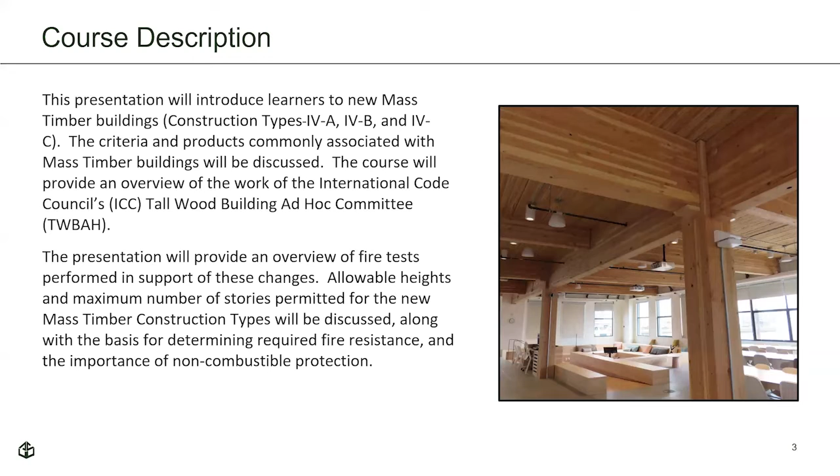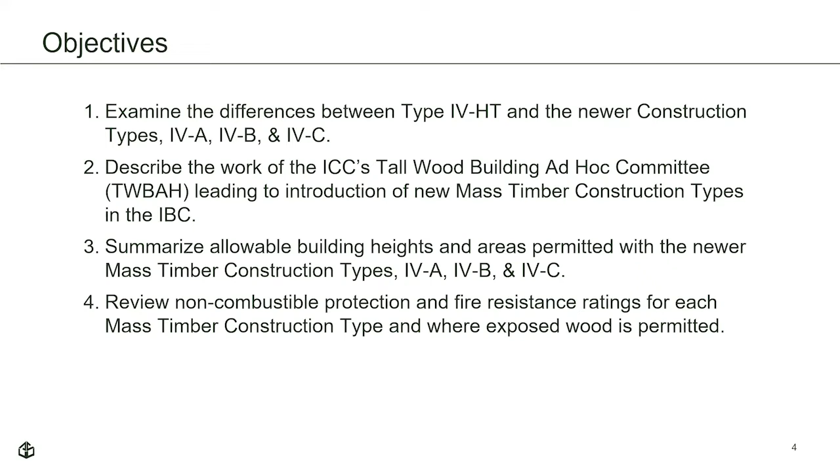We will introduce mass timber buildings that fall under the Type 4A, 4B, and 4C construction types. Next, we'll provide some background and history on how the tall mass timber provisions were reviewed and promulgated into code changes prepared by the ICC's Tall Wood Building Ad Hoc Committee. Then we'll discuss some of the heights, number of stories, and areas associated with mass timber structures. And finally, we will review the importance of non-combustible protection and its contribution to the overall fire resistance ratings required with the 3 mass timber construction types, and review when exposed wood areas are permitted specifically under the criteria in Type 4B construction.

Let's begin by giving an overview of the various forms of mass timber and a brief history of some of the more recently developed ones.

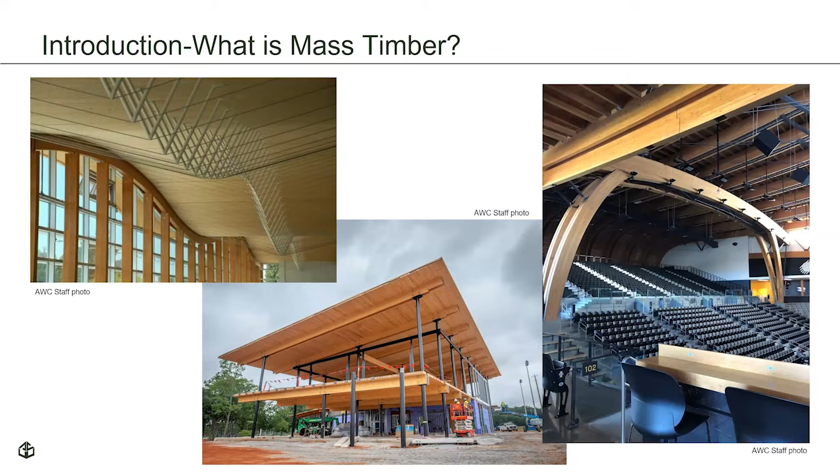So when we talk about mass timber, what does that actually mean? What do these buildings look like? How is it different from a post and beam or traditional heavy timber building? This slide is depicting the newer mass timber style of construction. In the center, we have a hybrid steel, glulam beam, and cross-laminated timber building on the campus of Penn State University. The photo on the left is the Samuel Brighouse Elementary School in British Columbia, Canada. Notice the undulating form of the glulam beam above the curtain wall assembly. And on the far right is the University of Idaho's Idaho Central Credit Union Arena for both men and women's Vandals basketball, located in Moscow, Idaho.

Before we move on to the next portion of this presentation, I wanted to briefly note one very important point. As I hope you've gathered from the pictures we've seen so far, mass timber construction is very different from conventional, repetitive light frame construction. In mass timber construction, the members have significantly larger cross-sectional dimensions and are much further apart. Also, there tends to be fewer concealed spaces, and these spaces are required to be protected if they are combustible. Consequently, the structural design and response to fire of a mass timber building are significantly different from how a repetitive light frame structure would be affected. These inherent differences provide the basis of historical prescriptive provisions for Type 4 HT construction, as well as for the new mass timber construction types 4A, 4B, and 4C.

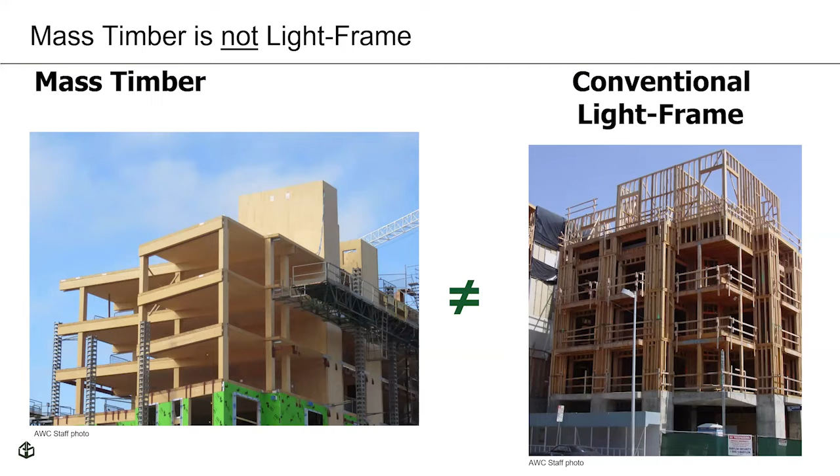The concept of mass timber, or tall wood buildings, is not a new one. Many of these older buildings, including the examples shown here, have still not reached the end of their service life. These historical timber buildings were constructed using solid sawn heavy timber beams and columns. Exterior walls of these buildings are non-combustible and typically associated with masonry construction, and with a few exceptions, they were built in a manner that did not result in concealed spaces within floors and walls. This type of construction is now prescriptively addressed in the IBC as Type 4-HT.

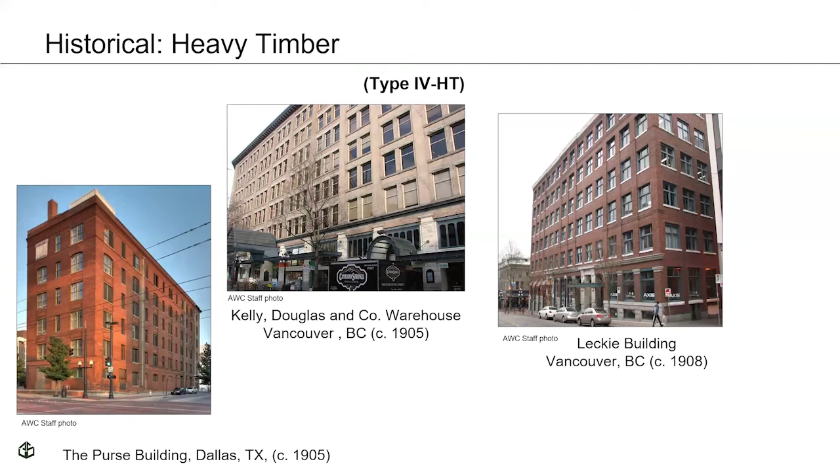The photo on the left is the historic Butler Building in Minneapolis, St. Paul, a 9-story post and beam heavy timber building. On the right is an in-progress photo of the iconic Brock Commons building, which at the time was the tallest mass timber building in North America, now in use as student housing on the campus of the University of British Columbia in Canada. It has a concrete podium with reinforced concrete stairway and elevator hoistway shafts and 17 stories of glulam and CLT floor ceiling panels. We'll take a look at the video that documents its construction on the next slide.

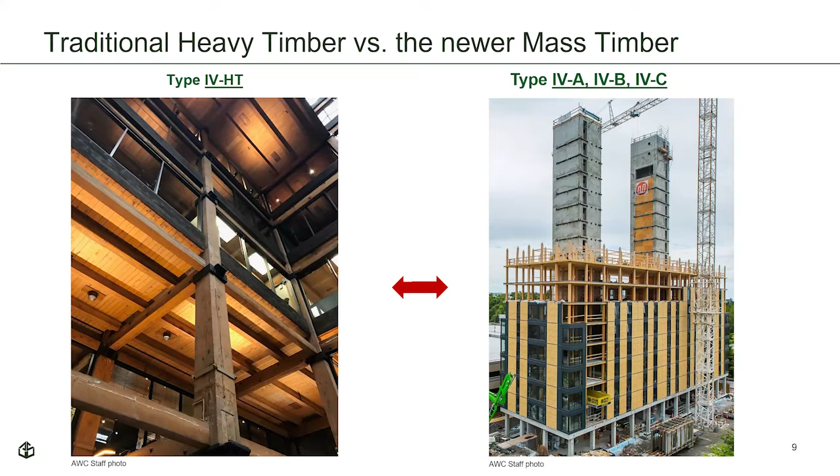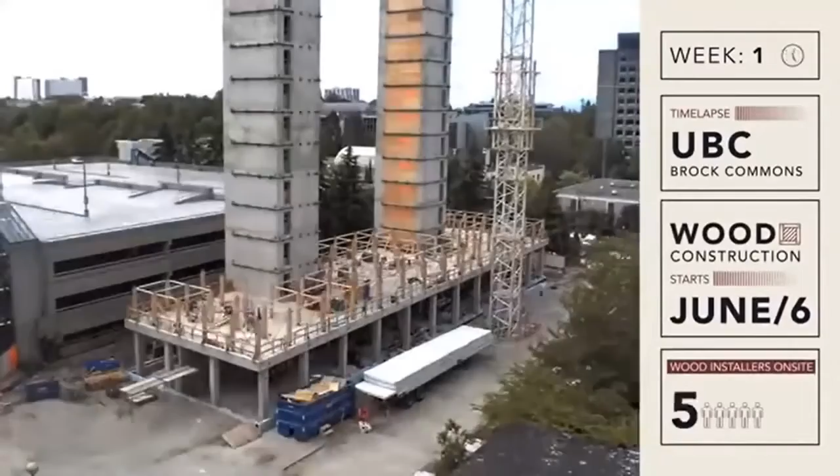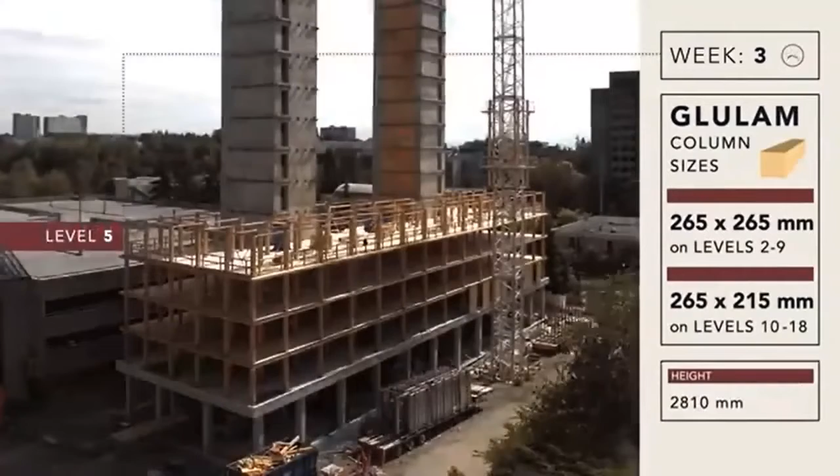So this is the 18-story Brock Commons building in British Columbia. As we mentioned previously, it's student housing, so it has a reinforced concrete podium on the base floor. You can see the two structures there that are reinforced concrete, the stairway shafts and elevator hoistway shafts. They use these to provide seismic performance and lateral resistance for this particular project.

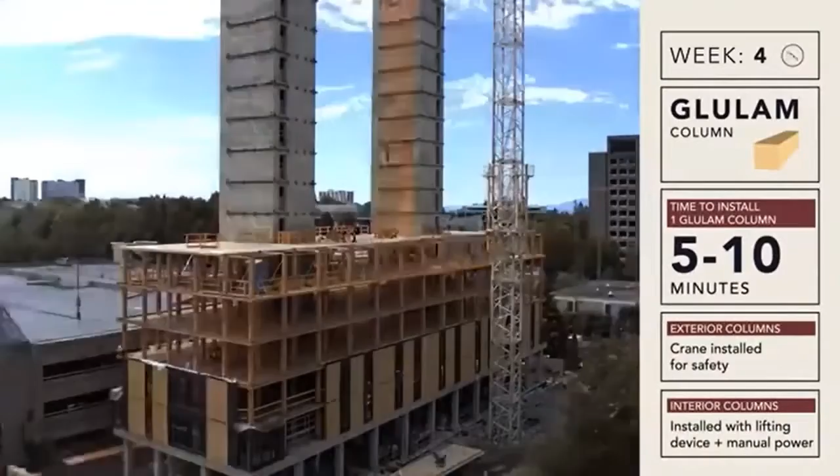You can see the description and the sizes of the glulam columns that support the cross-laminated timber floor and ceiling assembly, and some data as the slideshow progresses about how much time it takes to install each individual column, and the crews installing the panels on top of the columns.

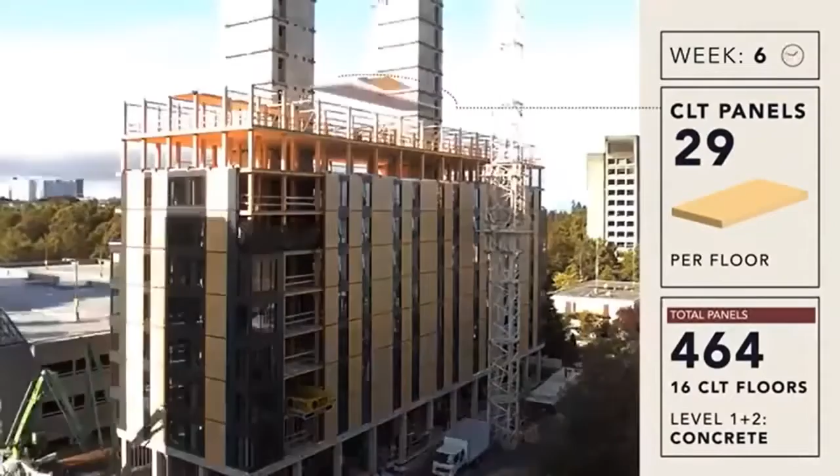The construction speed here is annotated on the slide, about 2 floors per week. There's no waiting for concrete to cure or reach structural strength, time periods of 7, 14, 28 days, et cetera, for concrete. It goes together pretty quickly.

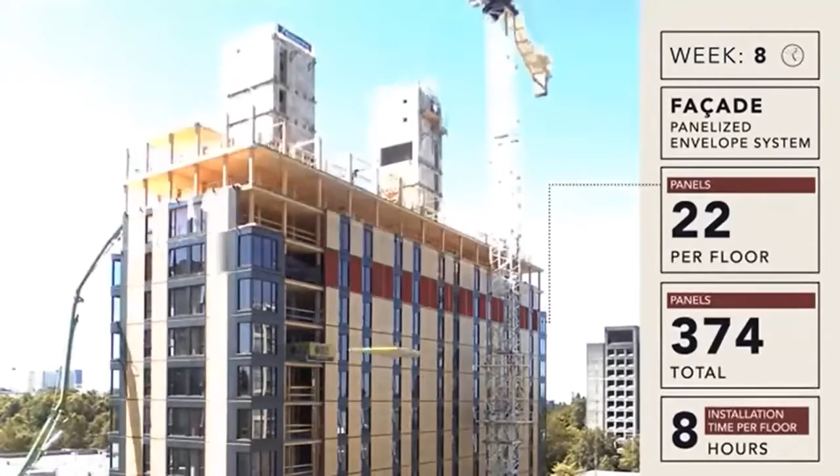A very, very small crew is typically required for these projects. You see the crane operator picking them right off of the trucks. It's typically quiet associated with these jobs, not as much noise as conventional construction. All the panels are CNC machined from the assembly plant, from the manufacturing plant, so there's very, very little waste. You can see the speed of construction there.

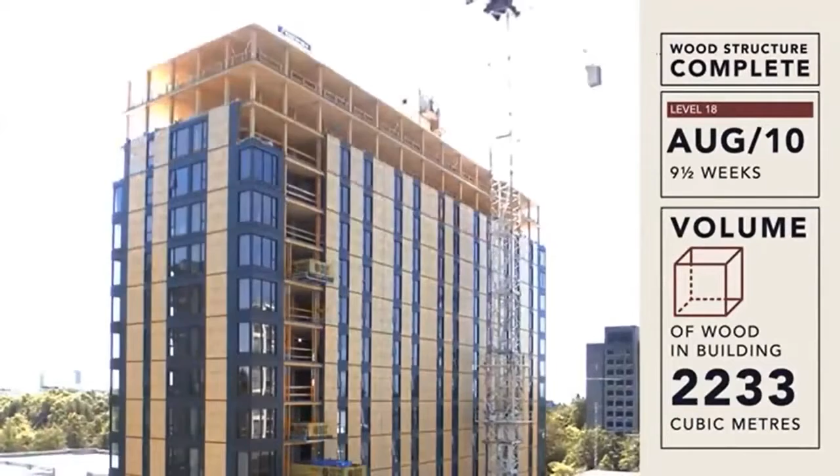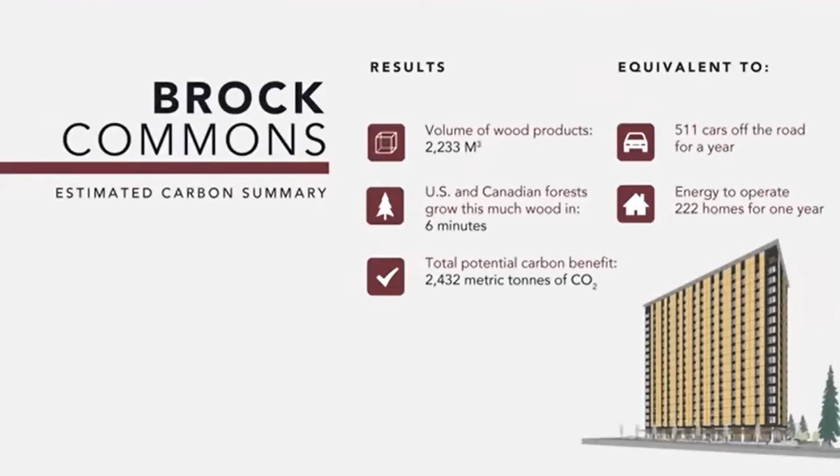Approximately 2,233 cubic meters of wood were used, and these have significant positive impacts about sequestering carbon and carbon dioxide benefits. So just a really, really innovative and interesting project. This is no longer the tallest structure in North America; there are some other projects we'll take a look at during the presentation.

Mass timber is a term used to describe wood products and built-up assemblies having large dimensions and substantial mass. This is a list of those elements often associated with mass timber, if they are large enough to be in compliance with the minimum size requirements for heavy timber as specified in Table 2304.11 of the 2021 and 2024 editions of the IBC.

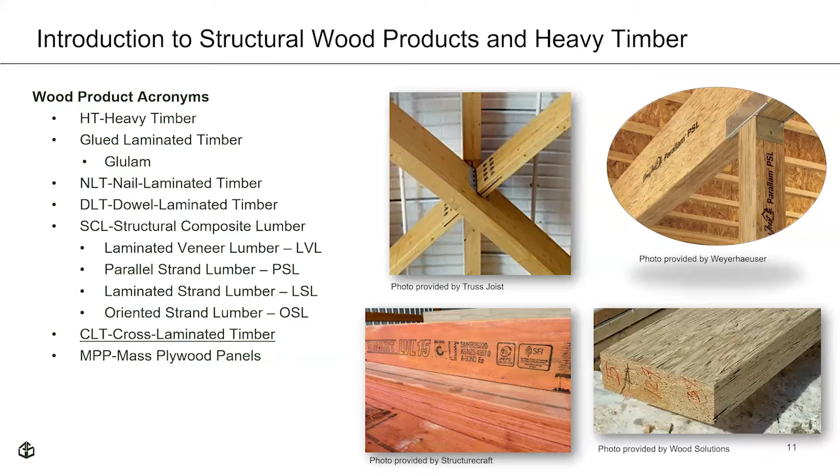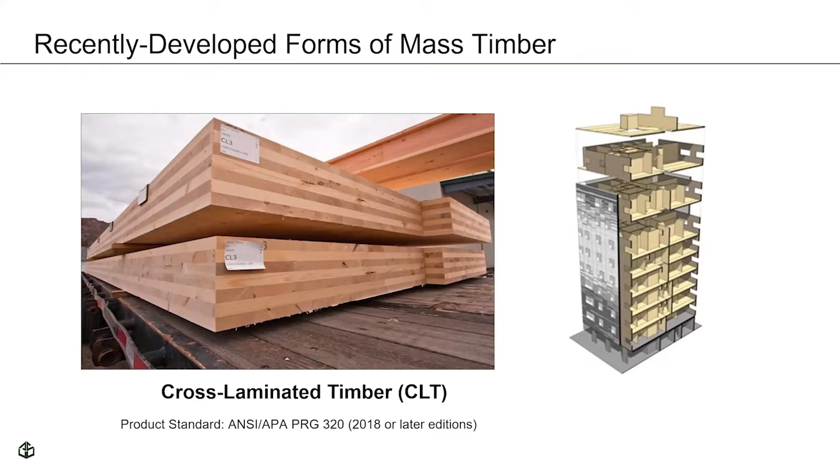Mass timber is a separate building system, really born because of one new product, cross-laminated timber, or CLT. CLT represents a paradigm shift in wood construction because of the new structural and fire resistance characteristics it represents. Never before have we contemplated solid wood floor and wall sections used in a similar manner as concrete walls and floors. CLT is typically dimension lumber, 2x lumber, laminated in a crosswise fashion, layer upon layer, to make solid wood floor, wall, and roof panels up to 20 inches thick and 60 feet long. What has been used so far is typically more like panels between 6 and 9 inches thick. CLT panels are typically fabricated in odd numbers of laminations, 3, 5, 7, 9 plies, etc.

For example, due to regulatory programs promoting green and sustainable construction, England has seen a tremendous increase in the use of mass timber construction, with over 500 buildings built to date. The U.S. Building Code, known as the International Building Code, or IBC, adopted provisions and definitions recognizing CLT as a heavy timber product starting in 2015.

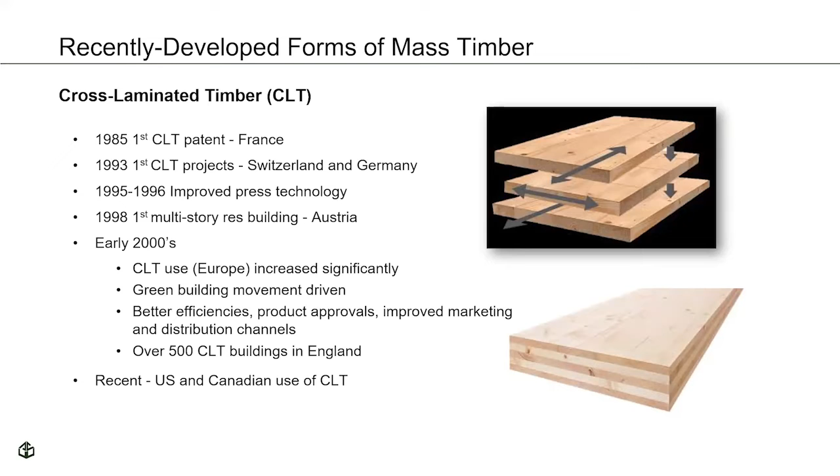Another type of mass timber which has been in use for several decades is glue laminated timber, also known as GLT or glue-lam. Glue laminated timber beams meeting the minimum dimensions can be used in heavy timber or type 4 HT construction and the mass timber construction types as well.

Standard widths of glue-lam members can exceed 12 inches and standard depths can be up to 60 inches, or 5 feet. Glue-lam members are constructed with smaller dimensional lumber, typically nominal 2x lumber, which are adhered to each other using heat-resistant exterior grade structural adhesives.

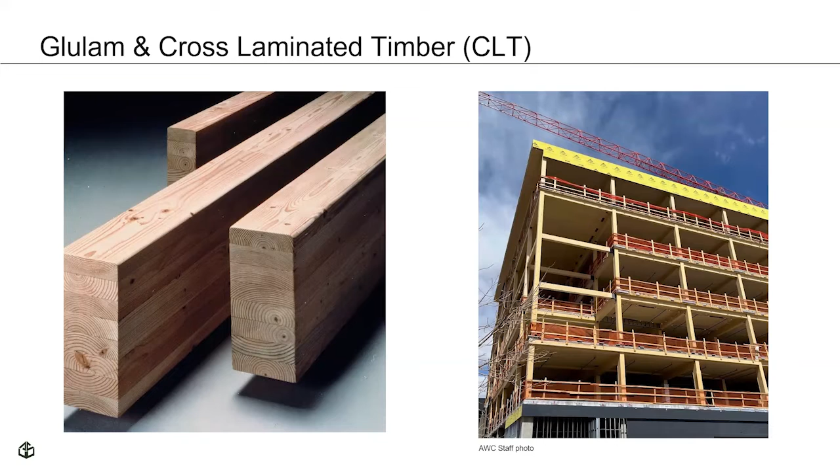In glue-lam, all the laminations are oriented such that they are parallel to one another. Glue-laminated members are typically used for flexural applications, for example beams and girders, or compression applications such as posts and columns. However, they may be used in tension applications too.

You can see some structural similarities with the student housing building project at Brock Commons. The Ascent project exceeded the prescriptive limits for tall mass timber in the 2021 IBC. The Ascent project has a 6-story concrete podium or pedestal, and then 19 stories of glue-lam columns with CLT floors and ceilings. Currently, the Ascent building is the tallest mass timber structure in the world.

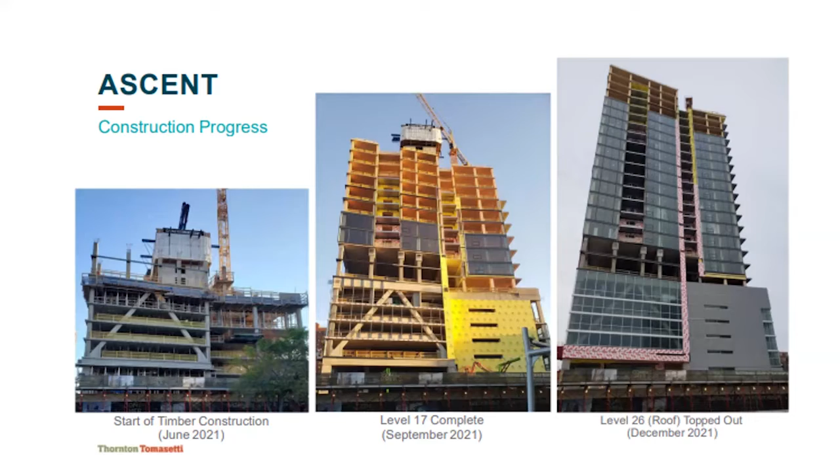Now let's discuss the critical role the ICC's Tall Wood Building Ad Hoc, or TWBAH for short, had in reviewing the mountains of data required for the code change proposals associated with mass timber buildings.

The TWBAH was a balanced committee that was intended to develop consensus by input from experts throughout the country, starting with experienced building and fire officials, leading structural and fire protection engineers, fire protection experts, and representatives from all building material and construction-related industries. The meetings were open and participated in by any interested parties, including participation in work groups.

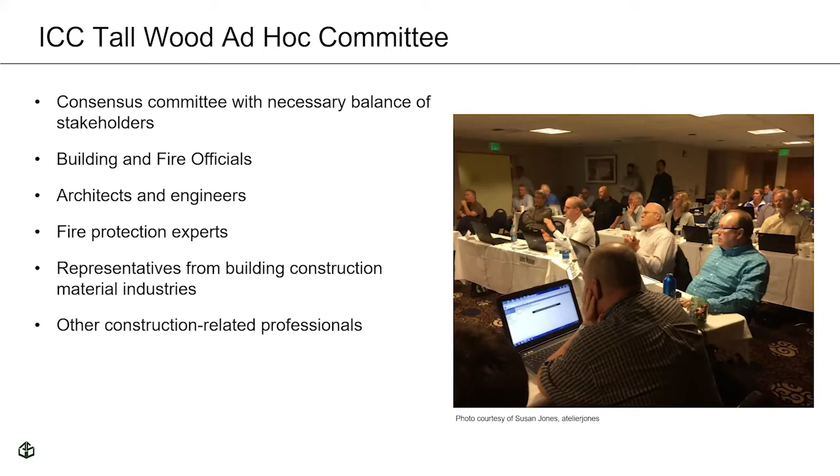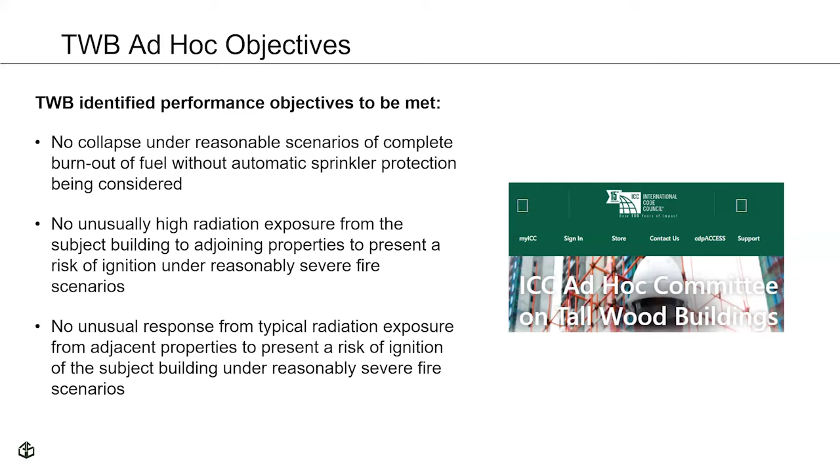Some of the key tenets from the TWBAH utilized when considering the tall mass timber code change provisions were: no collapse under reasonable scenarios of complete burnout in the absence of application of automatic sprinkler systems, no unusual levels of radiant energy exposure from the tall wood building to adjacent buildings, and no unusual response to typical radiant energy from a fire next door to the mass timber or other exposure.

No unusual fire department accessibility issues. There are often fire department accessibility issues on construction sites, so the committee felt it was important to introduce explicit provisions to ensure firefighter access.

Egress systems must protect occupants during escape time, plus an additional factor of safety. And lastly, suppression systems must be highly reliable. In fact, there are redundant suppression systems required for any mass timber building over 120 feet in height. After evaluating these performance objectives, the TWBAH was satisfied that all performance objectives were successfully met.

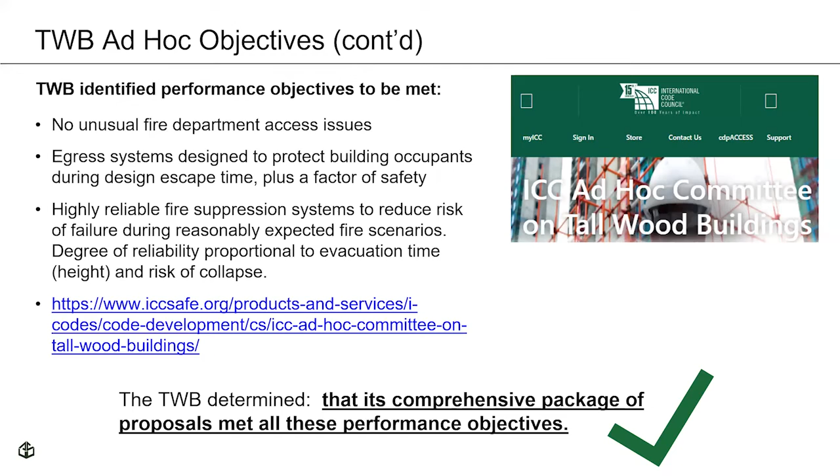One of the various work groups established to review potential code changes was the fire work group. They were tasked with determining realistic fire tests to evaluate the fire resistance and performance of a building constructed with mass timber elements. The express purpose of the test series was to evaluate occupant egress tenability and firefighter attack tenability.

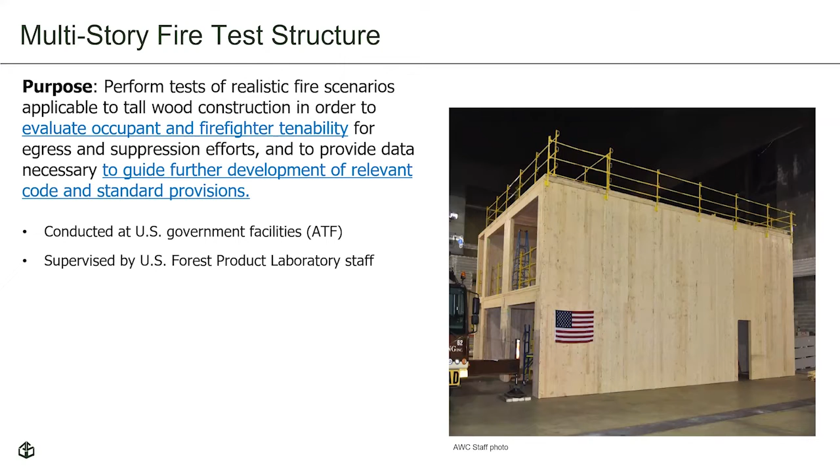Each new construction type in the 2021 IBC was based on at least one of these test scenarios. The fire test plan was drafted with the input of career fire service members who had real-world experience with fires in multi-story buildings and dictated the configuration of the buildings tested at the ATF lab.

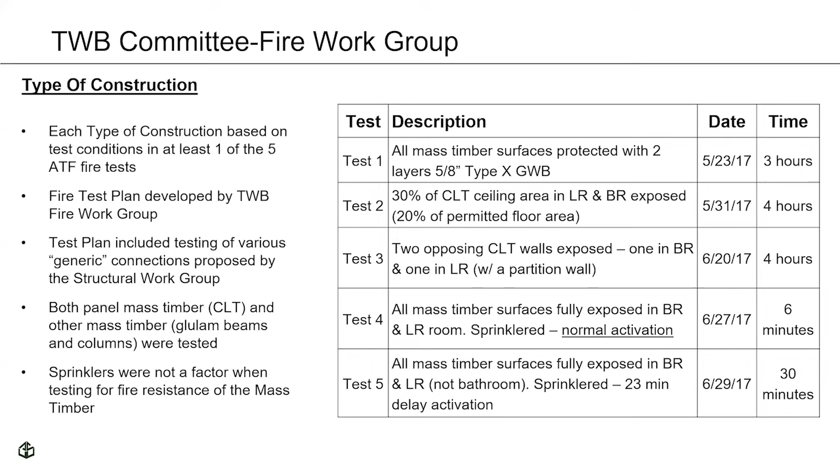Through penetration protection and connection protection were also included within the test structure. It should be noted that the ATF test structure included not only CLT members, but also glue laminated columns and beams.

You can see the attached corridor and two-story configuration of the test assembly. The fuel load was based on a North American study of fuel loading for residential use groups.

In fact, to ensure rigorous test conditions, furnishings and additional fuel load were added to achieve a fuel load equivalent to the mean plus one standard deviation. The actual fuel load used within the test structure corresponded to approximately the 85th percentile of residential fuel loads based on the survey.

Regarding the fuel loading, megajoules and megawatts might not resonate with some of our attendees in the audience today. For better comprehension or comparison, the energy release equivalent for test 2 and 3 would be like igniting 360 gallons of gasoline within the test compartment.

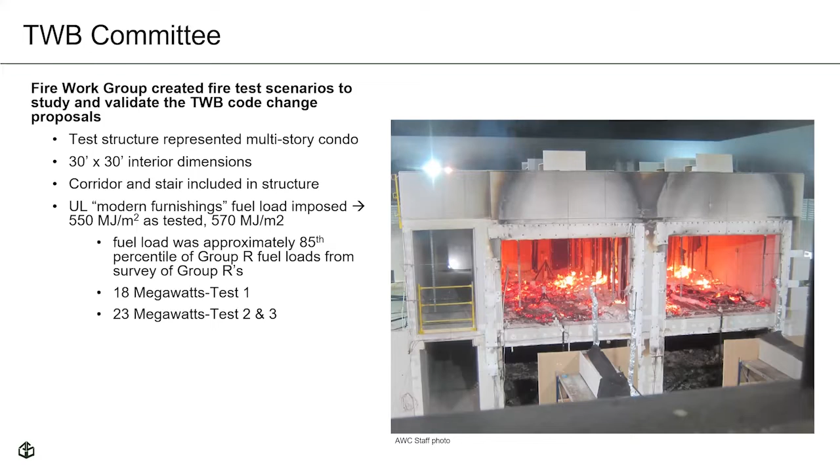No combustible material is permitted in concealed spaces of the soffits, which had gypsum protection on the mass timber, light gauge, cold form steel stud framing.

Each unit had plumbing, mechanical, and electrical penetrations, but no utilities were connected. The penetrations were protected pursuant to current code provisions to determine their performance in mass timber structures.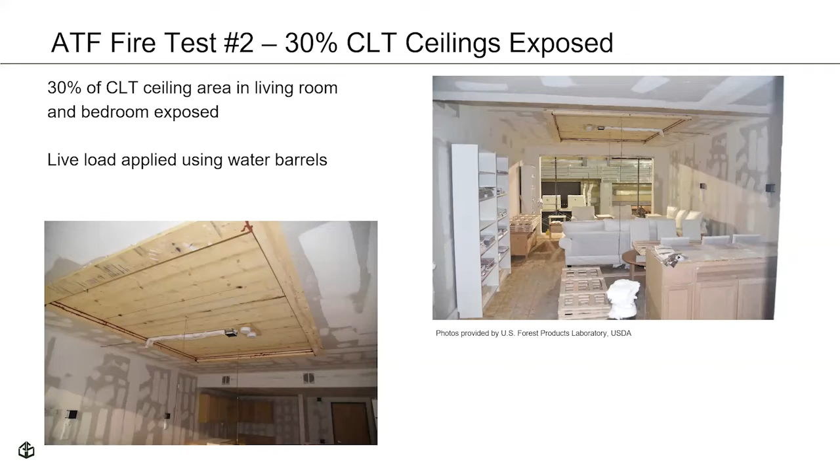So we're going to watch a highly compressed video of test 2. Remember that test 2 was the one with the exposed portion of mass timber on the ceiling. The test lasted for 4 hours, but this is a time-lapse video which compresses that down into about 3 minutes. It was produced by the folks at ATF, and I think they did a great job with it because it includes simultaneous views from multiple cameras placed throughout the structure.

I'll start the video here. Here you can see the multiple camera angles. You can see the fire service in fully protected gear entering the compartment. They're going to be igniting a gasoline-soaked rag in the same location for all the tests, which would be in the lower base cabinet area in the kitchen.

So the kitchen and the living room are combined, and the bathroom and the bedroom are combined as well. And there's a demising wall between those two spaces with gypsum wallboard and light gauge steel studs. So you can see our fire service are about to ignite the gasoline soaked rag. And I'll speed things up here in the interest of time.

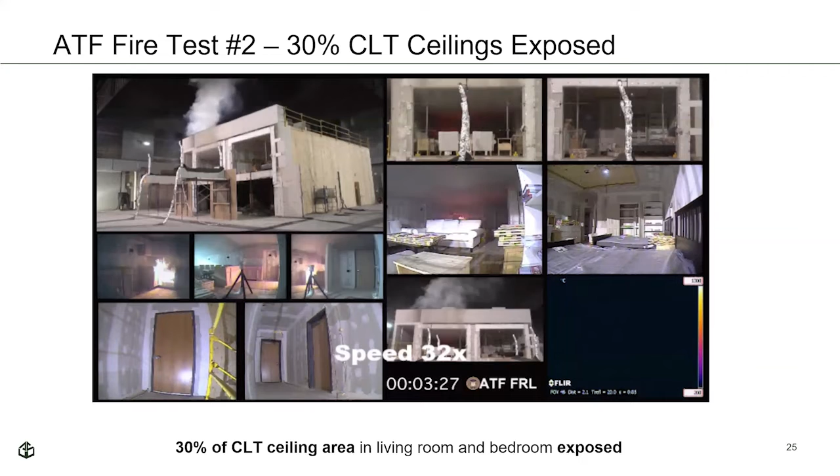It should be noted that just the contribution of the fuel from the base cabinets was enough to ignite the upper cabinets, and the combination heat release from the lower and upper cabinets is enough to cause flashover conditions in the great room compartment. So we're approaching flashover in the living room at approximately 12 to 13 minutes.

You can see the flames rolling on the ceiling there. And this will ensure the temperatures in the compartment reach flashover, which is measured 1 foot from the ceiling and 600 degrees C. Let's speed this up a little bit.

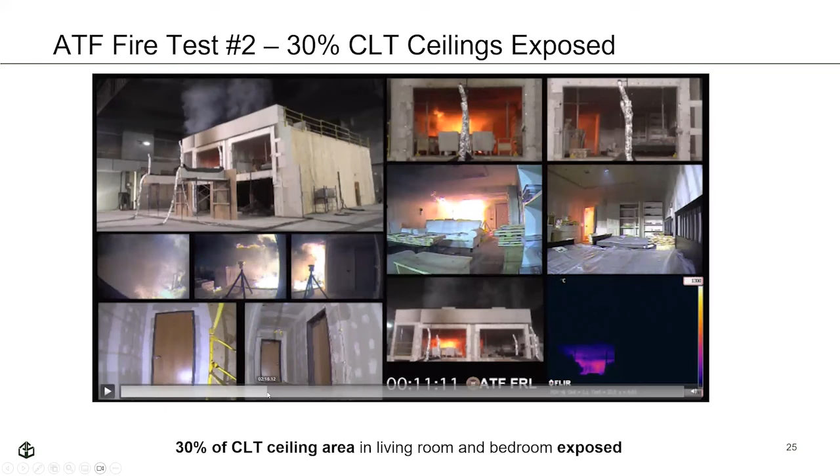So now we have flames rolling out of the opening. The cell in the bottom right is an infrared camera showing the heat release from the compartments. Notice that not all the furnishings have spontaneously ignited. The 2 chairs there are just about to spontaneously ignite now, but everything is in flashover conditions and fire growth in the first compartment.

You can see in the cell on the middle right of the video here that we have the mattresses wrapped up in plastic. They're foam mattresses. You can see all the combustible cribbing throughout the room, stacked in the room, and the heavy black smoke rolling through the open door. This door opening is going to allow enough heat and smoke into the joint bedroom and bathroom compartment to cause flashover conditions

in the bedroom. You can see the mattresses, the coverings are starting to pyrolyze there, and off gas, and they're going to spontaneously ignite with flashover.

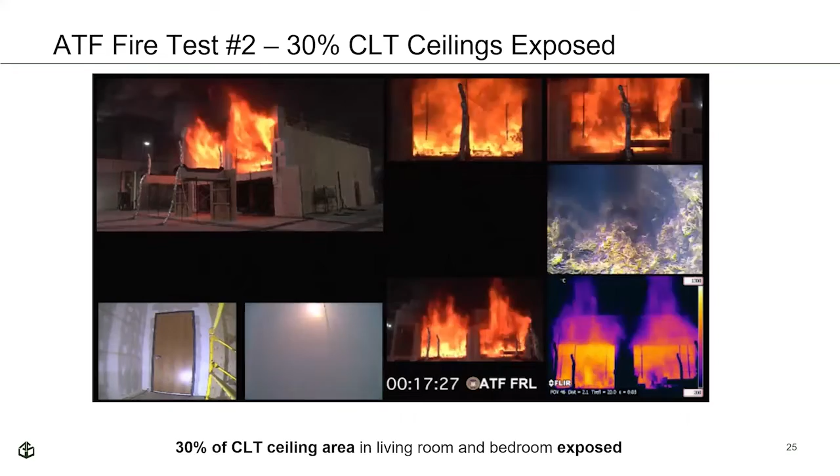The image on the bottom left of the video is the actual fire-rated door at the end of the corridor. And the image next to that, you see a little flame front penetration through the compartment door, through the dwelling door into the hallway.

So I'm going to speed this up. You can see the performance of the 20-minute rated door. Here, it'll fall into the opening, but you can clearly see that we're in the decay phase. The infrared imagery has drastically dropped in temperature, and they will continue to monitor this test to ensure that there's no fire regrowth conditions. And I'll speed it up to the end.

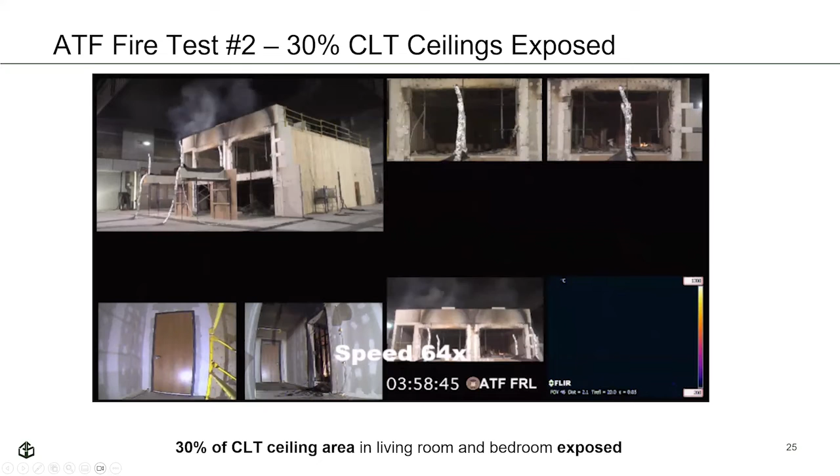Here are the still shots from test 2. Ignition to flashover in the living room is about 12.5 to 13 minutes. Flashover in the bedroom is approximately around 17 minutes. And then the fire proceeds to burn out and the mass timber elements self-extinguish. Notice the char formed on the exposed mass timber ceiling areas just as predicted.

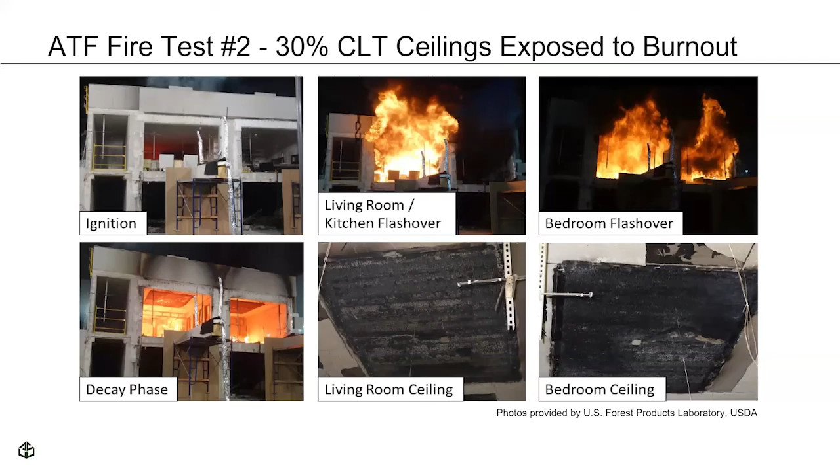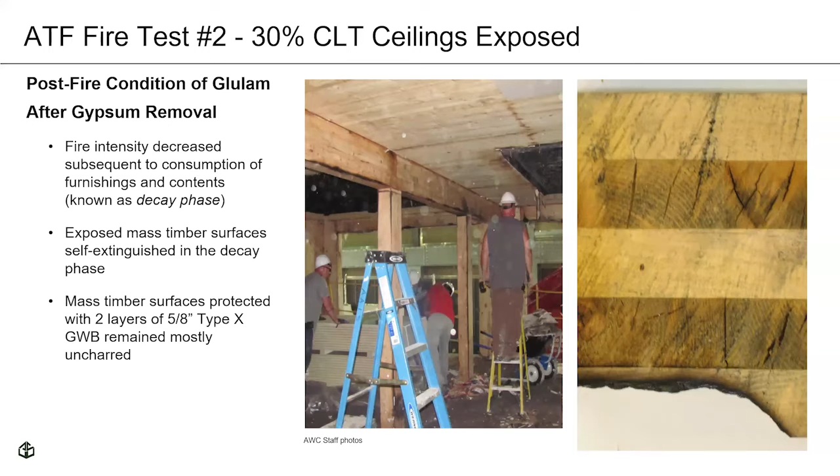Just like for test 4, in test 5, all mass timber surfaces were fully exposed in both the bedroom and living room. The sprinklers were purposely prevented from activating normally, then were manually charged 20 minutes after the time at which the automatic sprinklers activated in test 4. This simulated a scenario in which the sprinklers failed to activate automatically, but are then manually charged at the fire department connection by the fire service upon their arrival at the scene.

Flashover conditions were reached in the kitchen, and the bedroom was very near reaching flashover. Within 7 minutes of manually charging the sprinklers, the fire went from a fully developed stage to being effectively suppressed, as can be seen in the lower right photo.

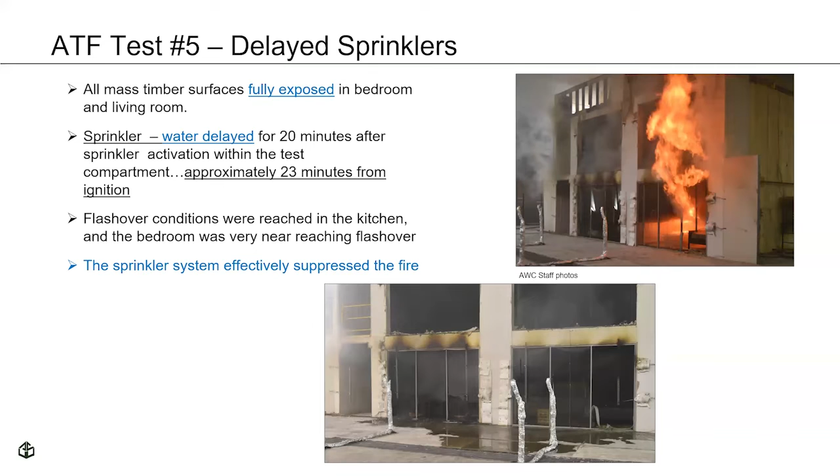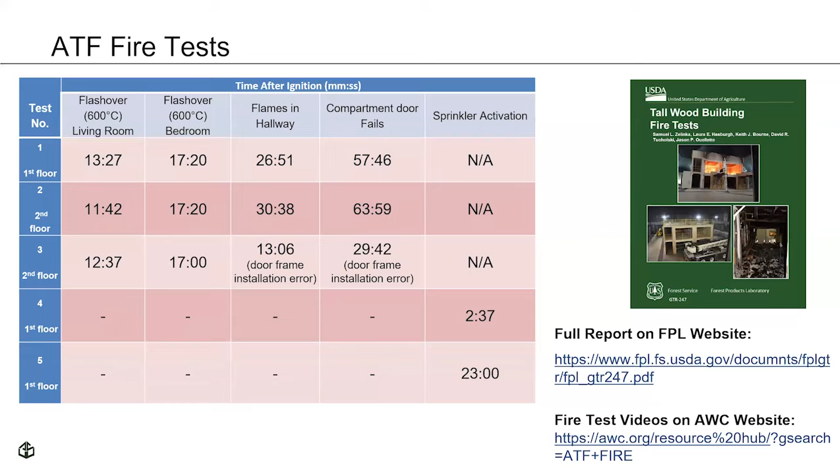Some data on flashover time, performance of the compartment door, and sprinkler activation times are listed in this table. The full report was published by the U.S. Forest Products Lab in 2018 and is available on their website at the URL address shown here. All the fire tests were recorded on video, and these videos are available for free public viewing.

Now let's review these new construction types, specifically types 4A, 4B, and 4C. I'll explain what each of these are and the prescriptive provisions associated with each.

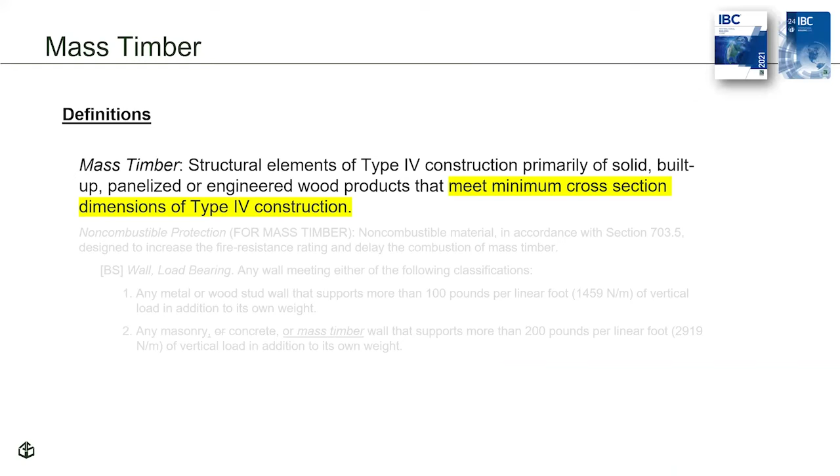A new definition was created to define mass timber. It is based on the same minimum cross-sectional dimensions as traditional heavy timber. The minimum dimensions for heavy timber are located in table 2304.11. This slide is providing information on the minimum sizes necessary to be considered mass timber. Details are found in IBC sections 2304.11 and 602.

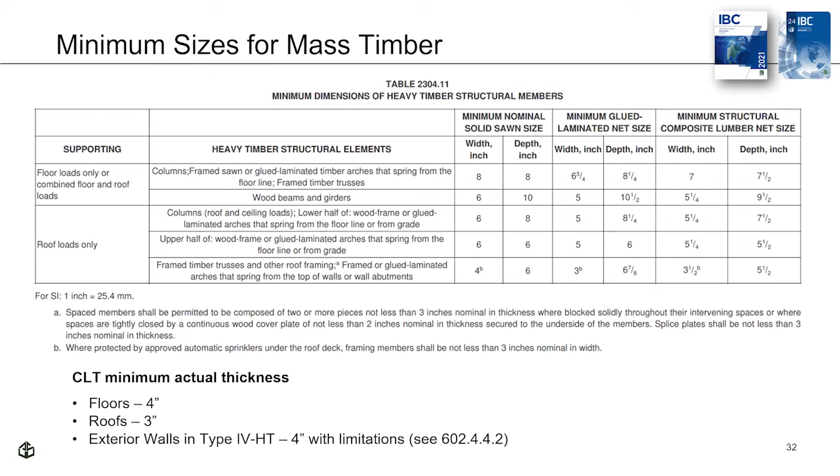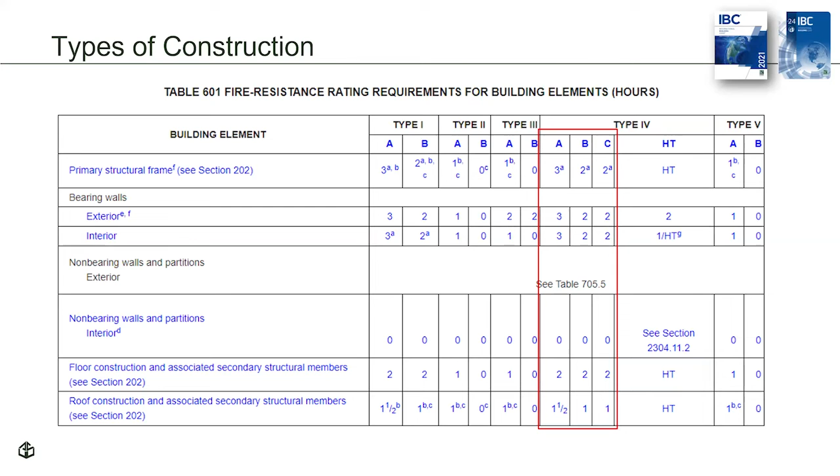Here is IBC table 601 showing the new columns for the 3 new types of construction. Notice that the fire resistance rating requirements for type 4A are exactly the same as those for type 1A. This is not a coincidence. Even though mass timber is combustible, it has to meet the same stringent fire resistance of the traditional non-combustible construction types. Likewise, both 4B and 4C have exactly the same fire resistant rating requirements as type 1B, or 2 hours.

The three new types of construction are described here. I mentioned earlier that these are designated as types 4A, 4B, and 4C. The TWB began by acknowledging that fully protected mass timber performed like type 1A construction. Thus, they chose to call that fully protected condition type 4A. A similar correlation was drawn to type 1B, so the partially protected condition was called type 4B. And simply to complete the list, fully unprotected mass timber was called type 4C.

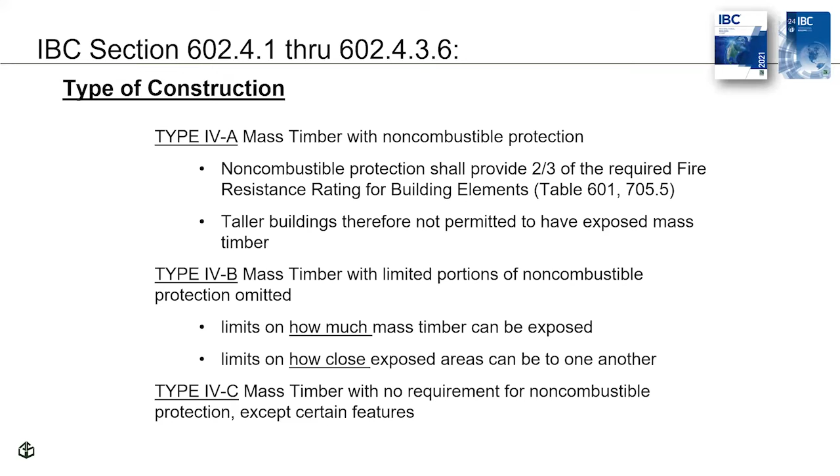Traditional heavy timber was left unchanged in the code, except that the name or designation was changed to type 4-HT, instead of simply type 4.

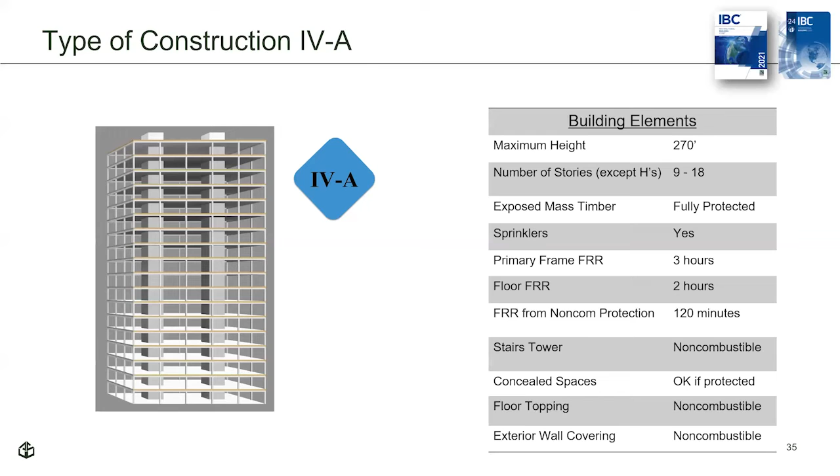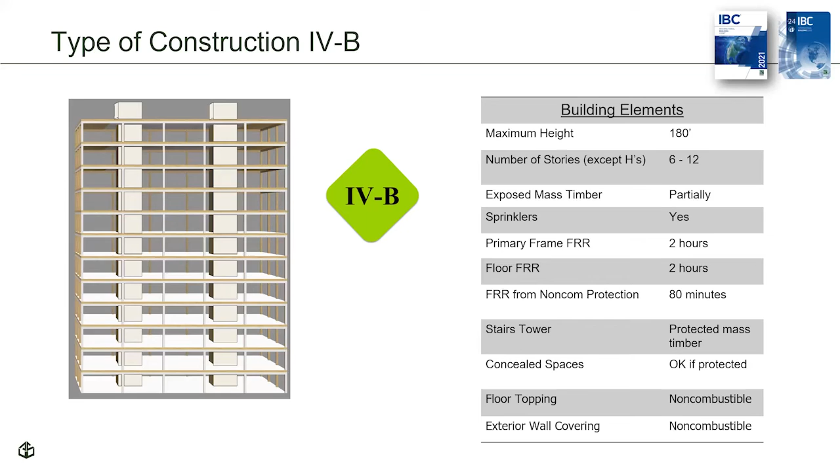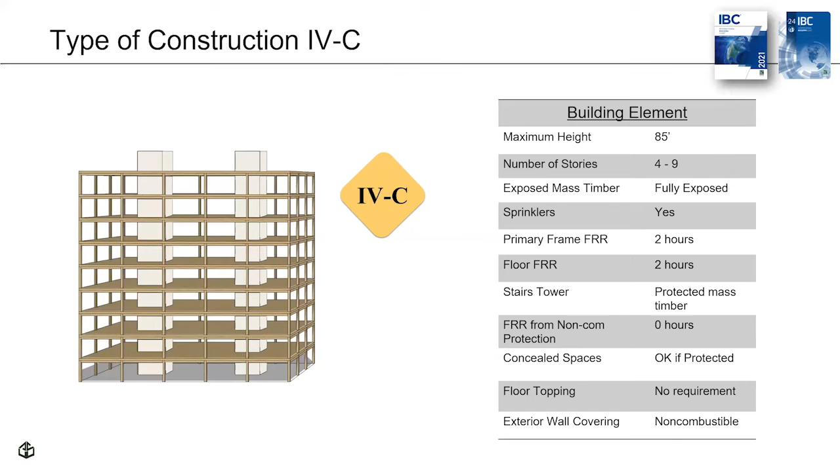Lastly, we are depicting a fully exposed type 4C mass timber building. But notice that even though it is permitted to have fully exposed wood surfaces, the criteria for 2 hours of fire resistance is exactly the same as the taller type 4B construction type. Again, the code has always addressed equivalent risk with equivalent performance. Even though the type 4C building is permitted to be fully exposed, it still meets the old type 4 heavy timber overall height limit of 85 feet.

Okay, let's review the prescriptive limitations on building sizes. In other words, the heights and areas, which are associated with these three new construction types.

Here are the new columns in Table 504.3, which specify the allowable overall heights in feet. Notice that the heights in feet are commensurate with the construction types with similar ratings, except type 4A does not get unlimited height. The unsprinklered limits are capped at those corresponding to the existing limits for type 4HT.

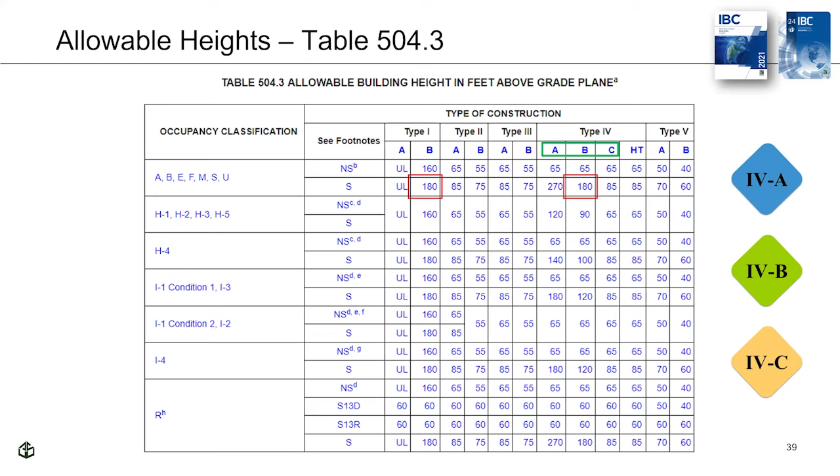The TWB decided that type 4A should be somewhat taller than type 4B. However, the TWB, continuing to take the more conservative approach, did not find it acceptable to allow the unlimited heights of construction type 1A to be applied to type 4A. Instead, a multiplier of up to 1.5 times the height of type 4B construction was utilized.

Here's an excerpt from the table which specifies allowable building heights in stories for the three new construction types. Notice that the unsprinklered height limitation for any occupancy is equivalent to the existing code height permitted for heavy timber. The code work group established a relationship between types 1B and 4B, and then between types 1A and 4A. Then the TWB examined each cell for efficacy and reason, and adjustments were made accordingly.

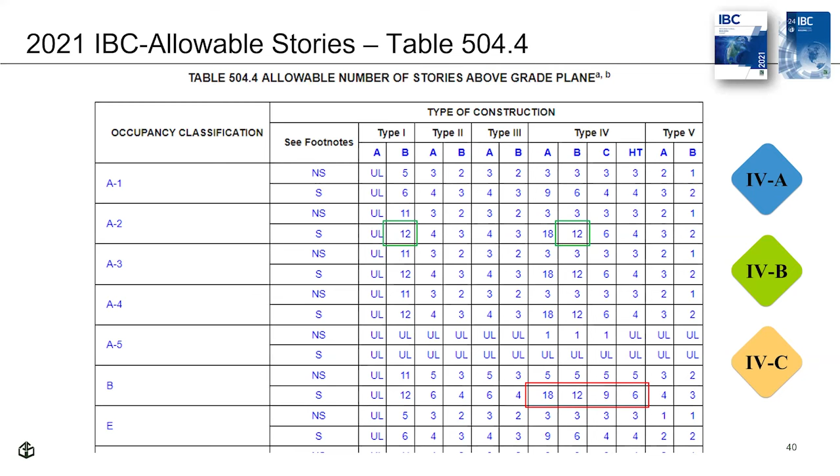Here's an excerpt from the allowable areas table. Since both types 1A and 1B are mostly unlimited areas, the TWB committee looked to existing type 4HT as a basis for area limits. The committee developed a relationship for each of the new types of construction.

You can gain valuable insight into these and other code changes by reading the code commentary for each ICC publication.

Again, the group looked at each occupancy type, risks, consequences, etc. Based on those assessments, professional judgment was applied to each cell, and the table is the result.

It should be remembered that these are the per story allowable areas. In a multi-story building, the per story area in the SM, or sprinklered multi-story value area, can be multiplied by 3 to get an allowable building area.

As you go higher than 3 stories, the average story will be reduced in order to limit the entire building area to 3 times the SM or sprinkler multi-story value allowable floor area. So your allowable floor areas will be reduced as the building gets higher. This is quite a contrast to the unlimited areas in Type 1.

Also, keep in mind that there are no rating reductions for the new Type 4 construction types that are provided for Type 1 construction.

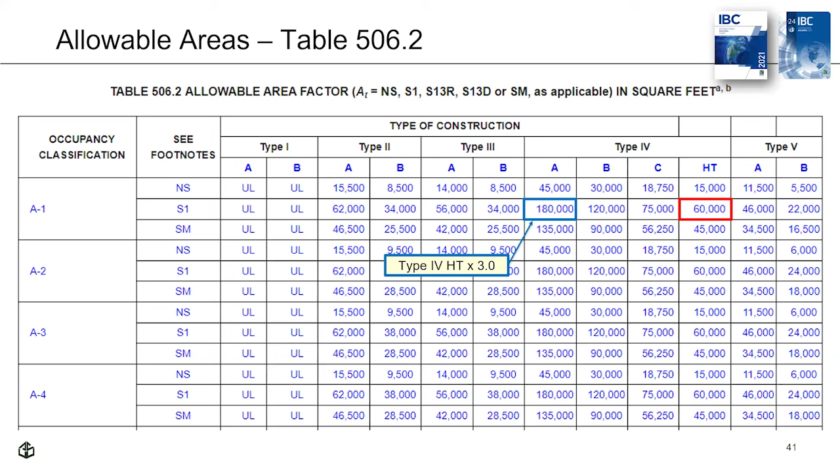And of course, for all 3 of these new construction types, sprinklers are required, and no combustibles are permitted on the outside of exterior walls or within concealed spaces.

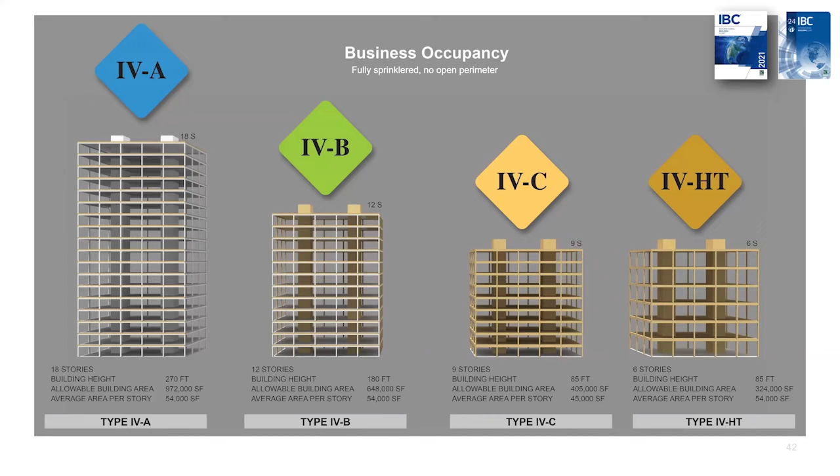This slide illustrates the height permitted for occupancy group B, the business occupancy, which is the tallest. The heights are the same for group R, except that Type 4C is limited to 8 stories instead of 9 stories.

Lastly, let's go into the concept of fire resistance when discussing mass timber construction. Non-combustible protection, as defined in the 2021 IBC, is a new term specific to the protection of mass timber. We'll talk about this a little later in the presentation.

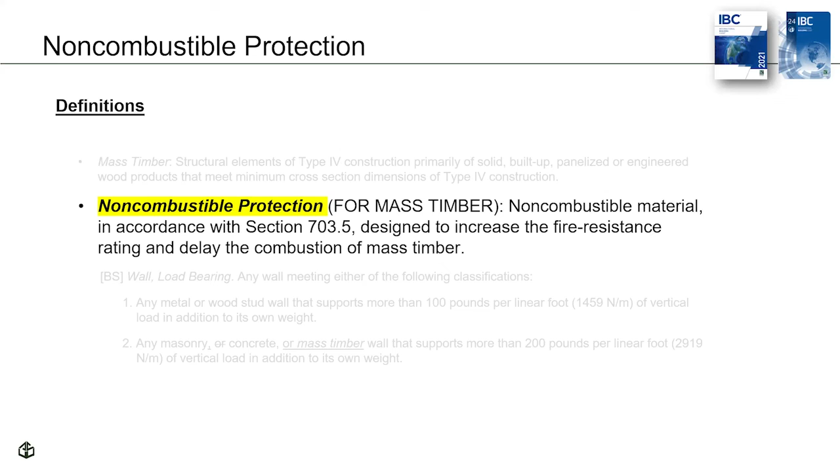First, let's go into a little detail about something here. The mass timber provisions bring with them something new. There's a nuance here to fire resistance that is unique and specifically developed for the protection of mass timber buildings in these new construction types.

What is shown on the screen now is the actual code text. The required fire resistance rating of mass timber elements is determined in IBC Table 601, and for specific provisions for exterior walls, IBC Table 705.5.

The portion of the fire resistance from the mass timber itself is determined in accordance with Section 703.2, which provides 3 methods.

703.2.1 allows testing to ASTM E119 or UL263. 703.2.2 allows the use of analytical methods such as NDS Chapter 16 or the FDS Chapter 3. And 703.2.3 allows the use of approved alternative methods.

We've seen how a primary premise for types 4A and 4B construction and their associated building heights, which we'll see later, is that these buildings should be able to withstand until burnout a contents fire that is not controlled by sprinklers or addressed by firefighters.

This is a very conservative approach. And this means that for type 4A and 4B for this to happen, the non-combustible protection plays a particularly important role in that it provides for a contents fire to burn out, and the contents and any exposed mass timber can self-extinguish if the fire is never addressed.

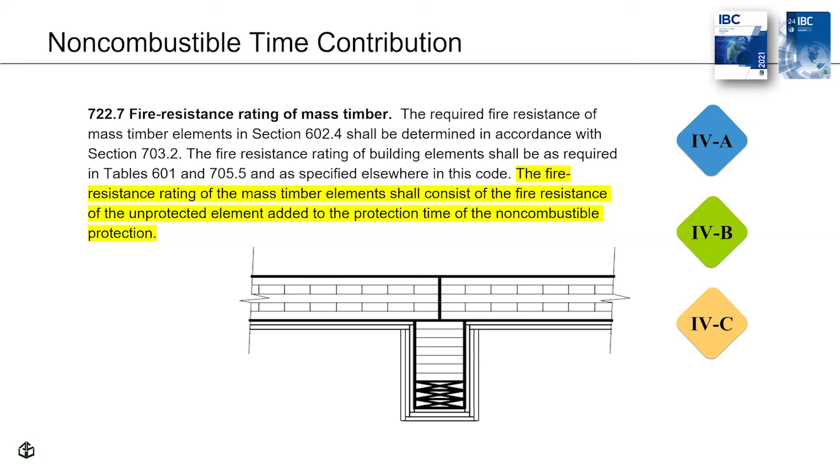Here the code is explicit about how the fire resistance is accomplished: simply the addition of the calculated fire resistance of the mass timber element itself to the fire resistance rating of the non-combustible protection. The code is going to provide minimums and assign quantities that can be added.

The fire resistance protection recognized as being provided by various non-combustible protection types is specified in table 722.7.1 parens 2. Note that the number of 5/8 type X gypsum board layers that would be necessary to achieve the required non-combustible protection is the same as the number of hours of fire resistance rating required per tables 601 and 705.5.

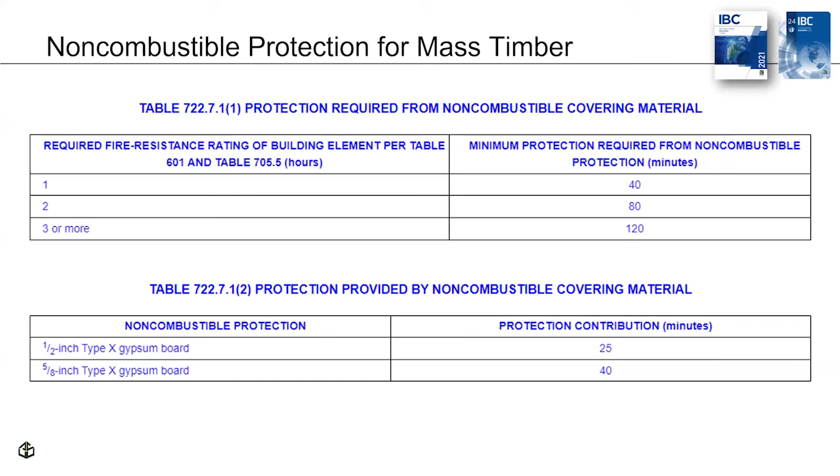In buildings of type 4A, B, and C construction with an occupied floor located more than 75 feet above the lowest level of fire department access, up to and including 12 stories or 180 feet above grade plane, interior exits are permitted to be constructed of mass timber elements.

For interior exit enclosures in type 4A height restricted, and 4B and 4C construction, the fire resistance rating of a protected mass timber element can be determined by adding the FRR of the unprotected wood member to the non-combustible protection FRR applied to exposed wood.

However, the FRR must be met on both the shaft side and the room side of the mass timber elements per IBC sections 602.4.1.6, 602.4.2.6, and 602.4.3.6.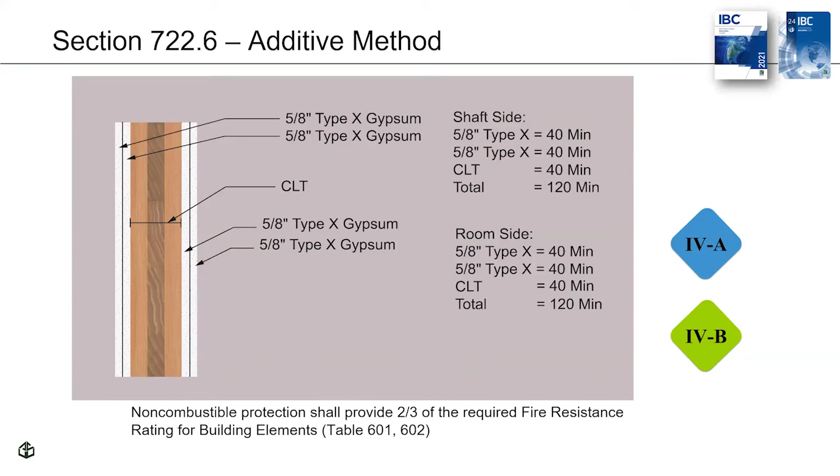One thing that is different in the 2024 IBC is in item 1 for Type 4B construction. Specifically, the limit on exposed mass timber on the ceiling will be increased from 20% of the floor area to 100% of the floor area.

This was justified based on extensive large-scale fire testing performed at the Research Institute of Sweden in 2020, which, among other things, validated the performance of heat-resistant adhesives in preventing char fall-off and preventing fire regrowth conditions, provided that the walls were covered with non-combustible protection.

Again, typically, the fuel load in the compartment is exhausted as the room and contents are completely consumed in the fire. Once the heat release rate decreases from loss of fuel, the exposed CLT surfaces self-extinguish. Thus, they no longer contribute to the fuel load and heat release rate associated with the fire.

Here you can see the provisions for unprotected portions of mass timber walls in Type 4B construction. In exception number 2, you can see that the columns and beams that are not within the walls or ceilings are permitted to be unprotected with regards to calculating the floor or dwelling unit area values. In other words, their area does not affect the calculations of other areas to be exposed under this section.

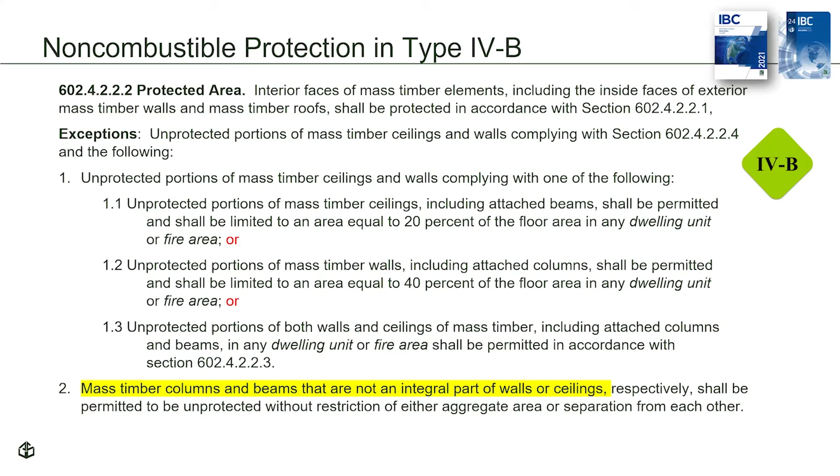Some of the key fire performance features that have been built into the new provisions for Type 4A through 4C construction are listed here on this slide. For example, the new IBC provisions require that mass timber elements be protected with non-combustible protection as specified in section 602.4. Structural elements are required to have a fire resistance rating as shown in IBC Table 601 and 705.5.

The adhesives used in CLT are required to be qualified through a series of both small-scale and large-scale fire tests that are required for glulam and structural composite lumber wood products to ensure that they do not undergo heat delamination, which could lead to fire regrowth, and combustible light frame members are not permitted.

You may have seen in some of the pictures I showed of the ATF test structures that cold-formed light gauge steel studs were used for the non-load-bearing interior partitions and infill. In fact, no combustibles are allowed in any concealed space except for those materials which are currently allowed in plenums by the International Mechanical Code, for example, such as insulated wires.

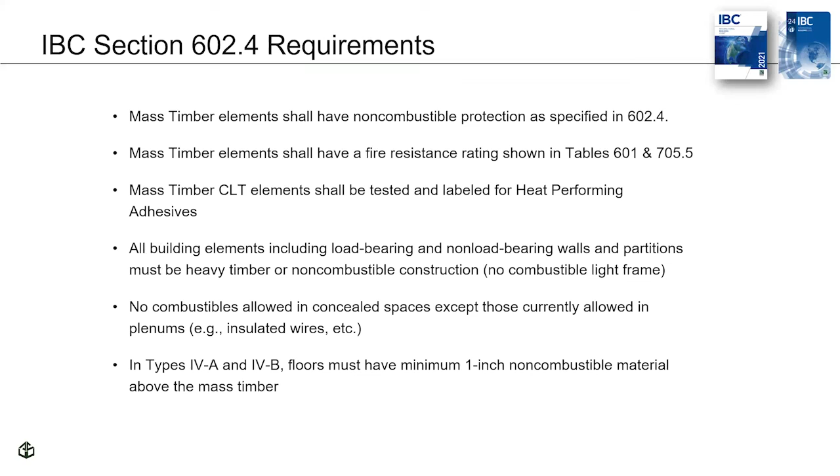Also, in Type 4A and 4B, floors are required to have non-combustible topping that is at least 1 inch thick. Typical examples of this would include cast-in-place concrete or flowable gypcrete type products.

In all 3 of the new construction types, everything outboard of the mass timber and exterior walls is required to be non-combustible, except provisions for water-resistive barriers, which must meet specific fire performance criteria. Also, all exterior mass timber walls in all three of the new construction types are required to have one layer of 5/8 type X gypsum on the outside.

Depending on the fire separation distance, additional non-combustible protection is required where an exterior fire resistance rating of greater than 1 hour is stipulated by Table 705.5. And of course, it is not explicitly called out here, but the interior side of the exterior walls are also required to meet fire resistance ratings as stipulated by Table 601.

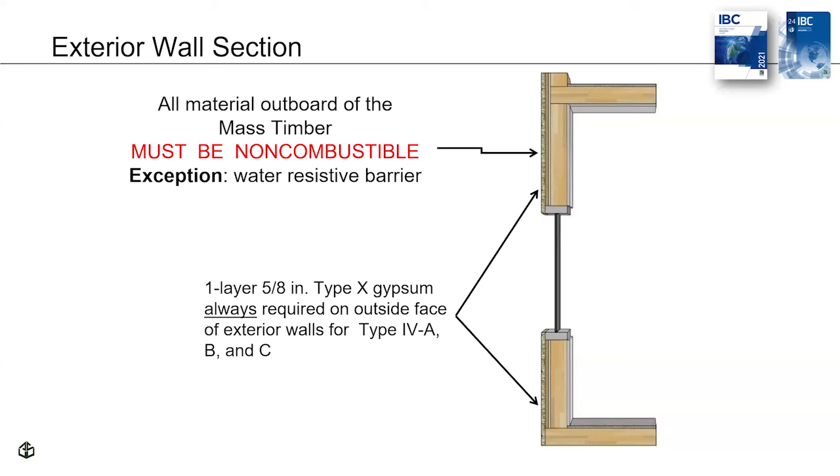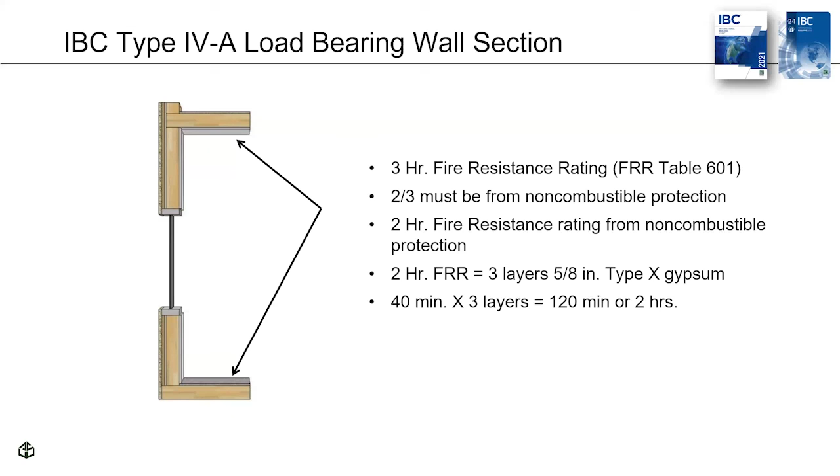As for the interior side of the exterior walls, you always have to design the required amount of fire resistance to resist the spread of heat, smoke, and flame from one place of origin to another of the building for a prescribed time. In the case of Type 4A, there would be no exposed mass timber elements, and it would require 3 hours of fire resistance, accomplished by the 3 layers of 5/8 Type X gypsum and the contribution from the structural mass of the mass timber elements themselves.

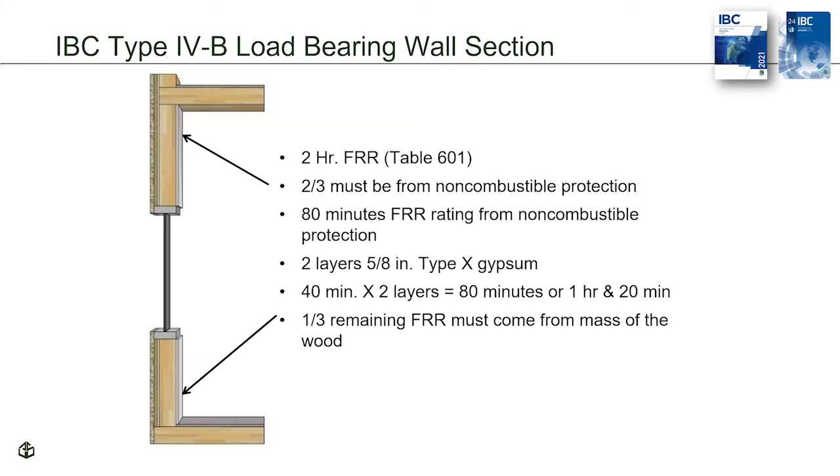This section demonstrates the required protection limits and applications for Type 4B construction. This interior application rating is for a fire resistance rating of 2 hours, and thus the non-combustible protection is 2 layers of 5/8 Type X gypsum, not 3 layers, as is required for Type 4A.

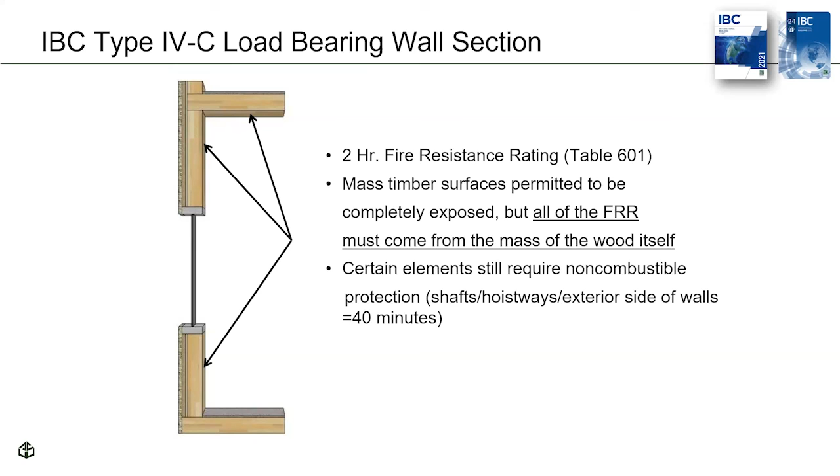To wrap up, we would like to provide some resources for you to assist you with your understanding of mass timber in the International Building Code.

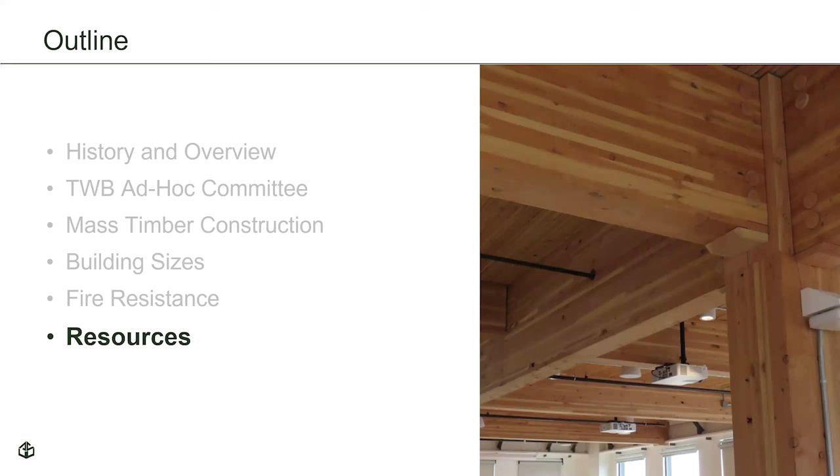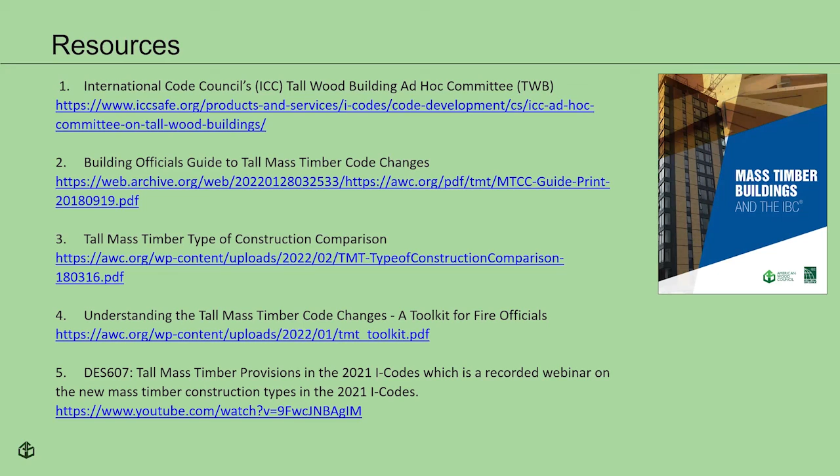That's the end of our presentation today. Hopefully, this has generated some questions from our audience.